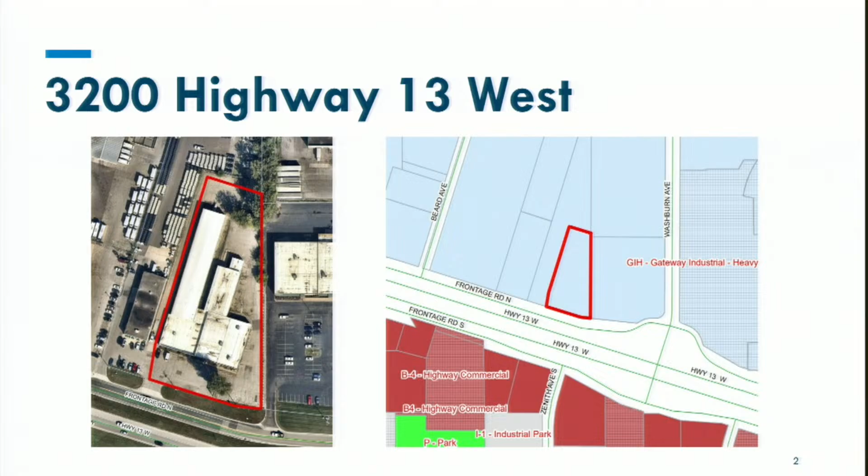Cannabis Connoisseur Company is seeking a conditional use permit approval to allow cannabis microbusiness at 3200 Highway 13 West. The property is currently zoned as GIH district, and within that district, cannabis microbusinesses are listed as a conditional use. Microbusinesses are defined as a person or entity licensed under Minnesota Statutes Chapter 342 to cultivate, manufacture, and sell cannabis products and related supplies, and to perform other activities authorized by the license. Cannabis Connoisseur Company is proposing only to do cannabis cultivation and manufacturing, with no retail components or features.

The purpose of the conditional use permit is to evaluate the use and the location, since it is heavily regulated by the state. They would occupy 9,800 square feet of space in the central portion of the building, directly west of Chillwater Cannabis Shop. Most improvements will be interior to the site, but there will be minor exterior improvements. These consist of a new rear employee entrance, infilling the east and west side doors, adding 3 to 4 parking stalls, and replacing the exterior doors with secure doors and locking mechanisms.

The Planning Commission previously approved Chillwater Cannabis Shop, I think it was two meetings ago, and at the time, Rootkind Holdings LLC had a purchase agreement in place to purchase the property. After further deliberation and consideration, Rootkind Holdings withdrew their purchase agreement, and the current property owner, Vern Equity LLC, will remain ownership of that property. The current property owner does not have plans to actively seek any other cannabis users. At this time, they only plan to allow these two cannabis tenants, the previous Chillwater Cannabis Shop and Cannabis Connoisseur Company.

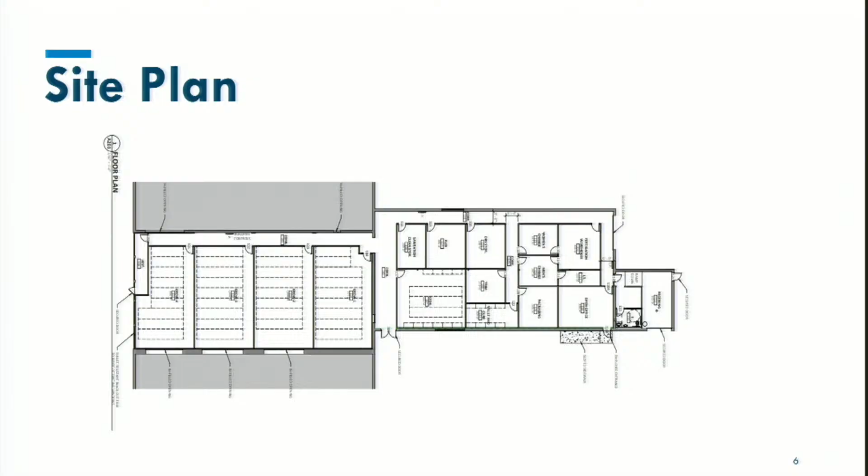City Code 10726 calculates the minimum number of parking stalls required for the site. This specific code section calculates parking stalls based on the use within the building, and staff calculated that the applicant requires a minimum of 13 parking stalls for the site.

Previously, Chillwater Cannabis Shop, staff calculated that they needed 18 stalls. That means together 31 stalls are required for this project.

Cannabis Connoisseur Company intends to add an additional 3 to 4 stalls to the north portion of their property near the new primary employee entrance. That will create a total of 42 to 43 parking stalls, exceeding the minimum parking requirements for this project.

The delivery vehicles will utilize the internal driveways to get to the property. They expect 5 to 7 deliveries per week, usually consisting of things such as soil, nutrients, pots, and processing materials, with common delivery vehicles being cars, pickups, and small box vans.

These deliveries will occur from 11 a.m. to 5 p.m., and unload time typically will take around 10 minutes.

Cannabis Connoisseur will not be transporting their own products because they are not a licensed cannabis transportation company. Instead, they will hire a licensed transportation company to deliver all their products to licensed retailers for resale or wholesalers.

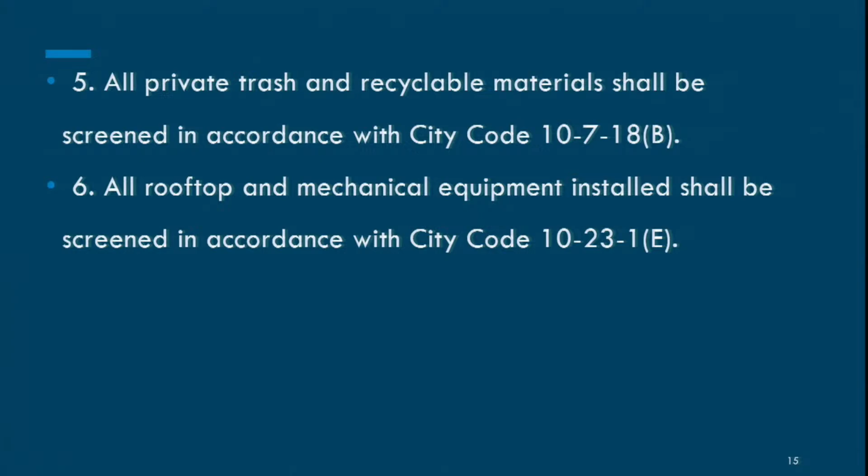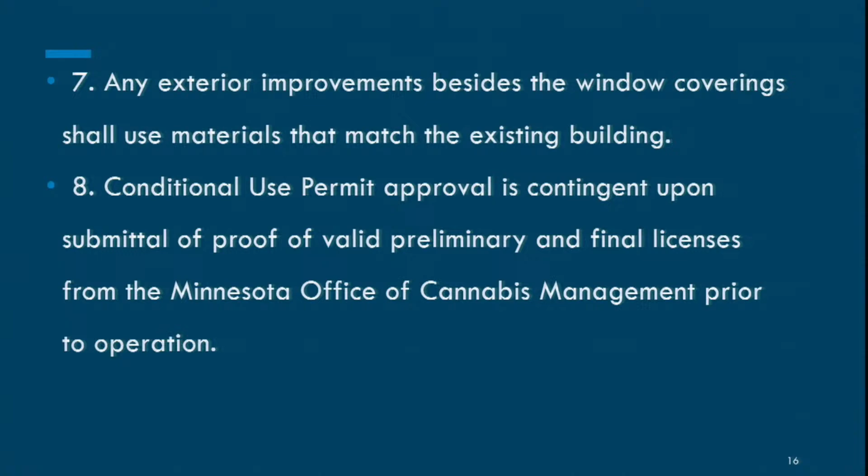All private trash and recyclable materials shall be screened in accordance with City Code 10718B. All rooftop and mechanical equipment installed shall be screened in accordance with City Code 10231E. Any exterior improvements besides the window covering shall use materials that match the existing building. Conditional use permit approval is contingent upon submittal of proof of valid preliminary and final licenses from the Minnesota Office of Cannabis Management prior to operation. The business shall maintain all required state licenses for the duration of the conditional use permit.

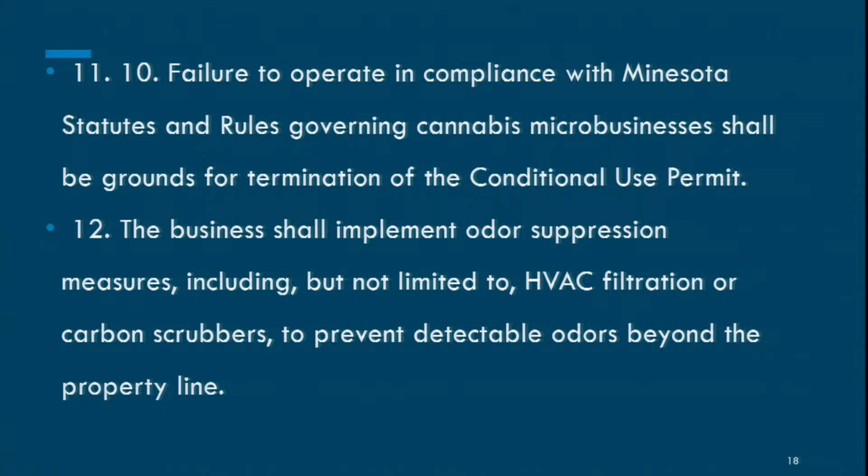All cannabis cultivation and manufacturing activities shall be fully contained within the principal structure. No outdoor activities or storage are permitted. Failure to operate in compliance with Minnesota statutes and rules governing cannabis microbusinesses shall be grounds for termination of the conditional use permit. The business shall implement odor suppression measures, including but not limited to HVAC filtration or carbon scrubbers, to prevent detectable odors beyond the property line. Security measures shall be installed and maintained consistent with the Office of Cannabis Management requirements and city code, including controlled access, exterior lighting, and surveillance cameras.

With that, I will stand for any questions that the Planning Commission may have for me.

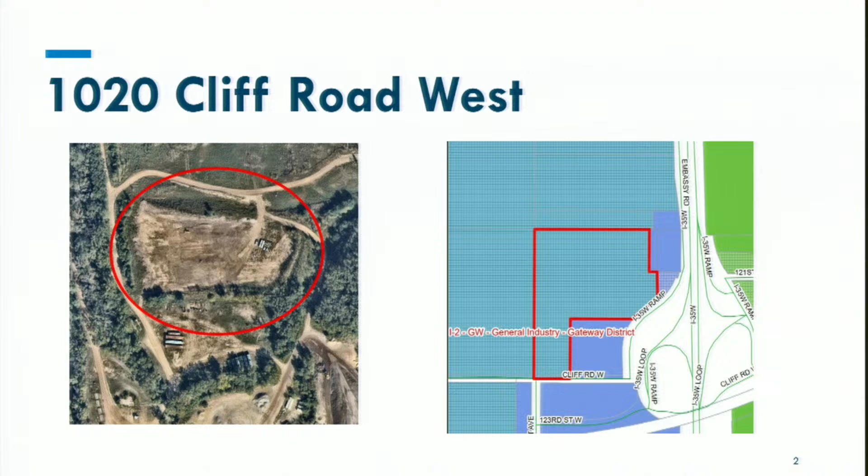Those specifically properties directly to the east and south in that other blue color indicate Ivy Brook Parking and also Commercial Asphalt Company. Directly east of the property is I-35W.

Carba is requesting 2 conditional use permit approvals: one to allow up to 5 kilns on the site, and the other to allow the storage of materials and equipment in the flood fringe. They currently have a year-to-year lease with Kraemer, located on the northeastern portion of their property. They intend to produce biochar by heating and drying wood chips, completely outdoors, and the current site is horizontally bisected by a flood fringe.

When they make their biochar, they intend to send their final product to Burnsville Sanitary Landfill to sequester carbon and to mitigate landfill odors.

Kraemer Mining and Materials owns the subject property and has received several approvals over the past several years. Most notably, approval from 2003 was a conditional use permit to grade and fill 40 acres of their flood fringe in the northeastern portion of their property, which is where Carba is currently located. The site at the time ranged in elevations of 700 to 720 foot elevation.

The flood fringe was about 717 feet, and the conditional use permit allowed Kraemer to increase their elevation between 717 and 721 feet above the flood elevation, therefore above the flood elevation itself.

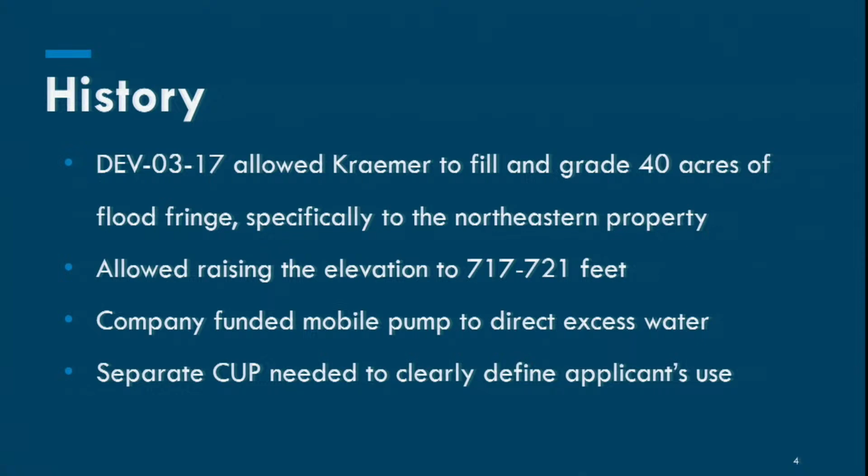Before 2003, the site was used as a holding site for rain events. As such, Kraemer paid the city to operate a mobile pump to force water from a nearby drainage ditch in high water conditions. This conditional use permit request is needed to separate the applicant's use from Kraemer and also to prevent liability for the property owner.

The first conditional use permit request is to allow kilns on the site, a maximum of 5 kilns on the property. The subject property is zoned I2 district, and kilns within that district are listed as conditional uses.

There will be a variety of equipment on the site, one of which will be a kiln. The other equipment includes things such as a storage trailer, rotary dryer, and stacking conveyor. All of this equipment will be stored on top of a concrete pad, and a vegetative management company will deliver wood chips daily to the site.

The wood chips will be stored in a trailer, conveyed to a rotary dryer, and then transferred to a rotary kiln to create the biochar. The operators will sample the biochar as it exits the rotary kiln for quality. It is then cooled, misted, and conveyed through a stacking conveyor. It's anticipated about 60 yards of biochar will be produced per day.

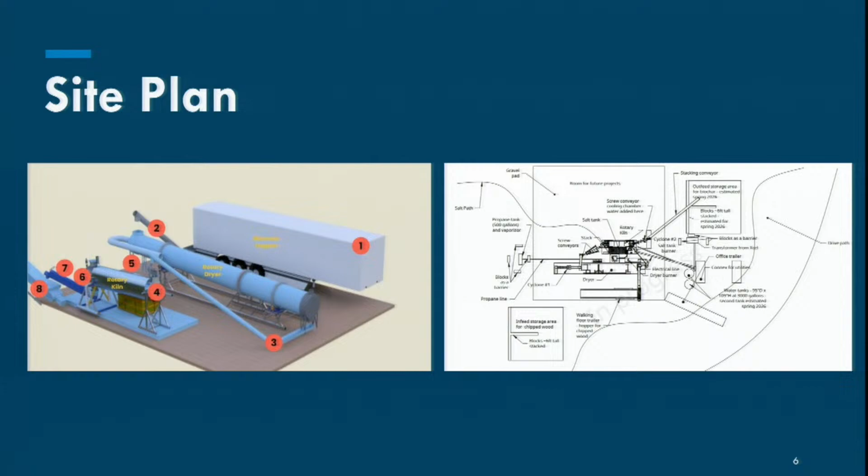Carba intends to start with one kiln for their project, and as they continue on, there's potential for increasing to an additional 4 kilns on site for a total of 5 kilns.

They don't anticipate any significant noise will be produced on site, considering that the rotary dryer and kiln have a 9-inch thick exterior. It will likely not be louder than any ambient industrial noise to the surrounding areas, and likely not louder than traffic along Interstate 35W.

There's potential for some odor to emit from the site, and this will likely be a woody or smoky scent, but this odor will not surpass the Minnesota Pollution Control Agency's, or MPCA's, odor emission thresholds or Burnsville's nuisance codes.

The applicant did speak with the MPCA, and the MPCA determined that Carba will operate below their thresholds. For their own due diligence, Carba reached out to them and requested what's called an applicability determination report, also known as an ADR, for their own records. That is basically a formal MPCA review to determine applicable state or federal air permitting requirements, and MPCA will complete this within the calendar year.

The second request for the conditional use permit is to allow the storage of materials within the flood fringe. Looking at FEMA's mapping website, the most current FEMA map is from 2011 of the subject site, and it shows that where Carba will be located is in a flood fringe.

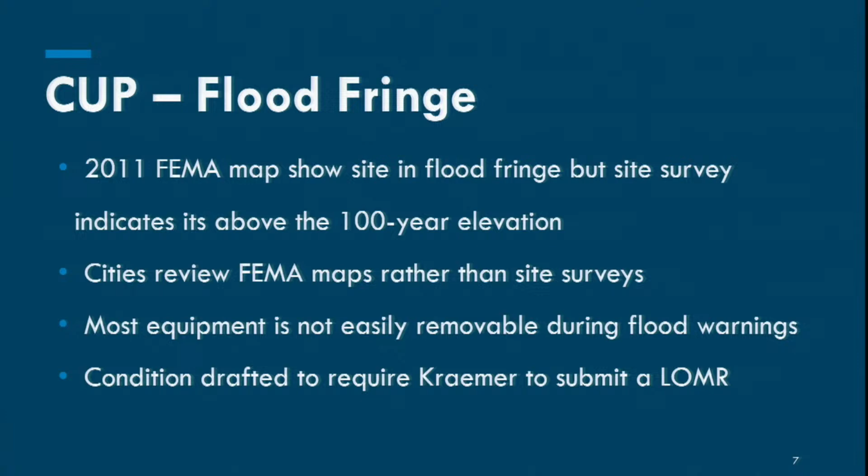Staff met with Kraemer to discuss this application and notify them that the FEMA maps are not up to date despite the 2003 approvals. Staff encouraged them, in their best interest for improving their flood insurance, and also if they intend to redevelop the northeastern portion of their site where Carba is located, that it's in their own best interest to complete a letter of map revision, also known as a LOMR. This is basically to update the flood hazard information and prevent discrepancies in the FEMA map. Staff added this as a condition to the report, and we asked Kraemer beforehand if this was an appropriate condition they were amenable to, and they agreed it would be. They had spoken with their legal team and agreed this was a good thing to do, and it sounds like they've just started some of the surveying work.

The site is located in the Drinking Water Protection Environmental Overlay Zone, and staff does not anticipate any impacts to the water resources. The kilns will be installed on a concrete pad, which will prevent soil infiltration, and Carba does not expect any leaks of the rotary kiln because introducing oxygen to the mechanism would substantially reduce the efficiency of the production of the biochar. Molten salt within the mechanism cools and solidifies at 446 Fahrenheit, and once solidified, it will not permeate into soils. If it did have a potential leak, the molten salt is non-toxic and not reactive to water. Carba also confirmed that the site has a secondary containment mechanism for potential spills.

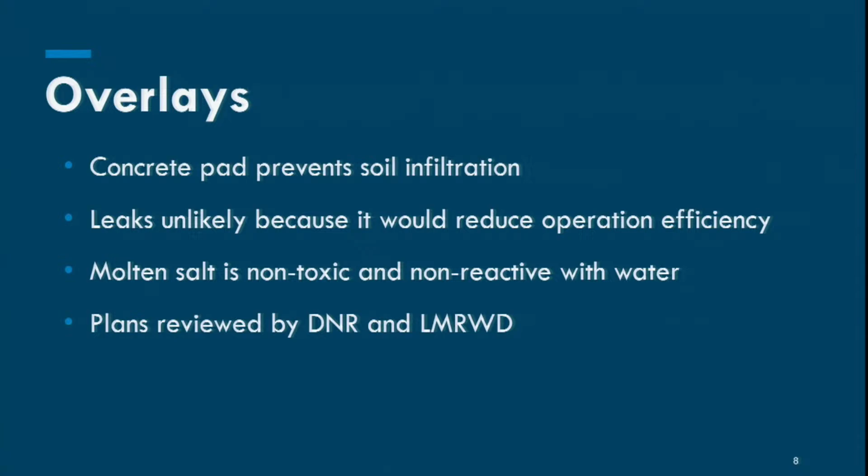We provided plans to the Minnesota Department of Natural Resources and also the Lower Minnesota River Watershed District, and they provided some comments about this, which can be seen in the report. To summarize, the DNR stated that the primary concern is ensuring that no materials are stored in the floodplain that are prohibited pollutants, and runoff shall go to a stormwater management system or be directed away from the floodplain. Staff required that berms be incorporated to prevent runoff and spills from reaching the surface water. After further analysis, staff also decided that it does not trigger additional stormwater management requirements. Staff then provided these plans to the Lower Minnesota River Watershed District, and they stated that a Rule C permit would be needed if land is filled or altered below the 100-year flood elevation. Lower Min recommended that Kraemer complete a letter of map revision with FEMA or the DNR for the area requiring updates.

There will be a gravel compacted area for employees to park on site. They anticipate having 2 to 3 vehicles parked at the site. These will be personal vehicles, and they will access the property either by Embassy Road or Cliff Road West using the site's internal gravel driveways.

The vegetative management company will provide 100 yards of wood chips per day. Carba will transport the biochar to Burnsville Sanitary Landfill every 2 weeks with a company trailer, and on the day they do that, it would be about 4 to 6 trips that day using the private roadways.

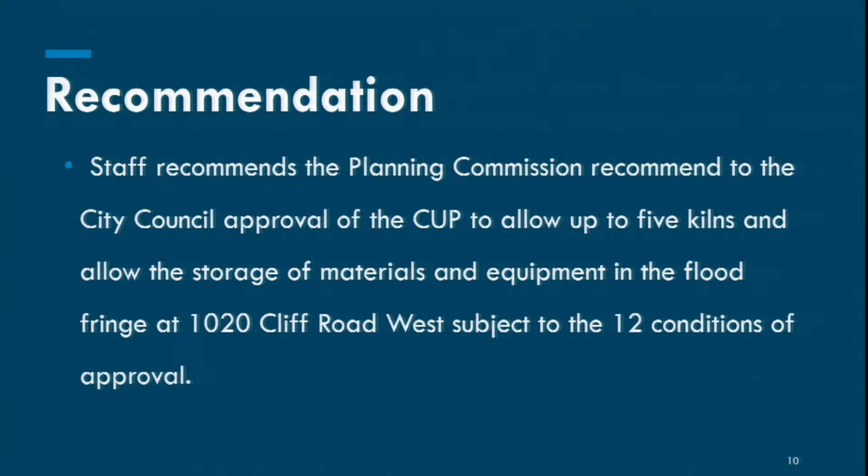Staff recommends that the Planning Commission recommend to the City Council approval of the conditional use permit to allow up to 5 kilns and allow the storage of materials and equipment in the flood fringe at 1020 Cliff Road West, subject to the 12 conditions of approval. The project shall be completed in accordance with the plans submitted as amended by the conditions of approval. Any significant changes to the plans as determined by planning staff shall require review and approval by the Planning Commission and City Council. The project shall comply with all applicable local, state, and federal regulations, including but not limited to MPCA's regulations and building and fire codes.

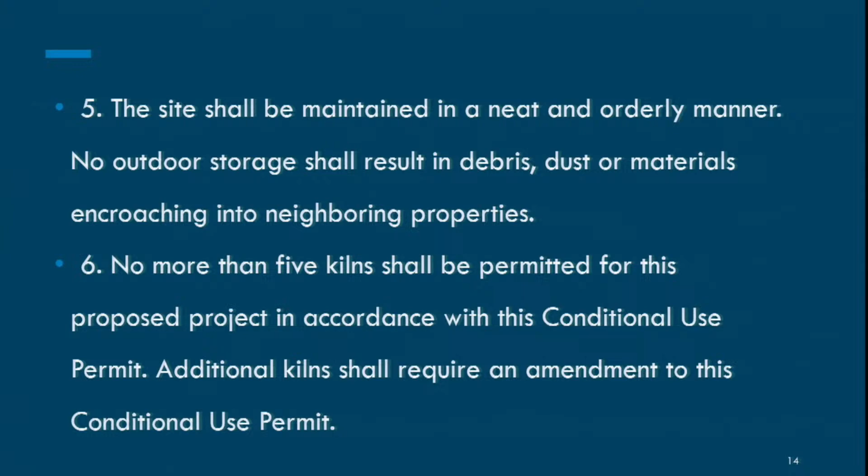Kraemer Mining and Materials shall submit a letter of map revision to FEMA within the calendar year of the City Council date. Conditional use permit approval shall expire 1 year from the date of City Council approval unless a building permit has been requested or a time extension has been granted by the City Council. The City Council may extend the expiration date of such approval upon written application by the person to whom the approval was granted. The site shall be maintained in a neat and orderly manner. No outdoor storage shall result in debris, dust, or materials encroaching into neighboring properties. No more than 5 kilns shall be permitted for this proposed project in accordance with the conditional use permit. Additional kilns shall require an amendment to this conditional use permit.

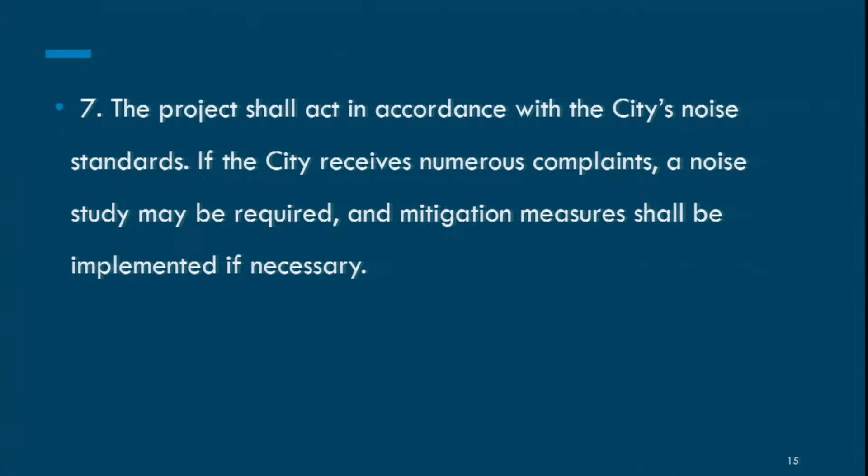The project shall act in accordance with the city's noise standards. If the city receives numerous complaints, a noise study may be required, and mitigation measures shall be implemented if necessary. The project shall comply with MPCA's odor regulations and the city's nuisance codes. If the city receives several complaints, the applicant shall take corrective measures to resolve the issue in a timely manner.

Any new exterior lighting shall be downward directed and meet City Code 10736. The project shall not have hazardous or environmentally detrimental materials or pollutants on site. This approval shall run with the land, but applies specifically to the biochar production facility.

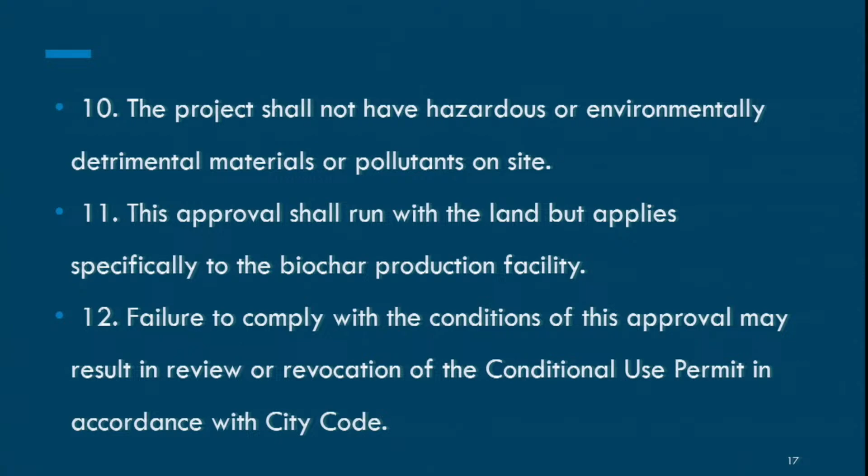Failure to comply with the conditions of this approval may result in review or revocation of the conditional use permit in accordance with the city code. With that, I will turn it over to the planning commission for any questions that you may have.

Thank you very much for a very detailed presentation. All right, commissioners, go ahead. Holly.

Excellent presentation, thank you. This is kind of a weird question, but condition number 3 is that Kraemer Mining and Materials shall submit a letter of map revision, but they're not the applicant. Is it because they're essentially the landlord in this process? How do we enforce that, since Kraemer Mining is not at the table here, they're not the applicant?

Right, yeah, that's a good question. We provided this condition because this was something that the Lower Minnesota River Watershed District highly encouraged that we pursue. We did have conversations with Kraemer to ask them if this was an appropriate condition to add, and they did agree to that. I understand it is confusing to have that as a condition, but after speaking with staff, it was my understanding that this is not something that CARBA would be responsible for completing. This is something that the property owner would be responsible for satisfying.

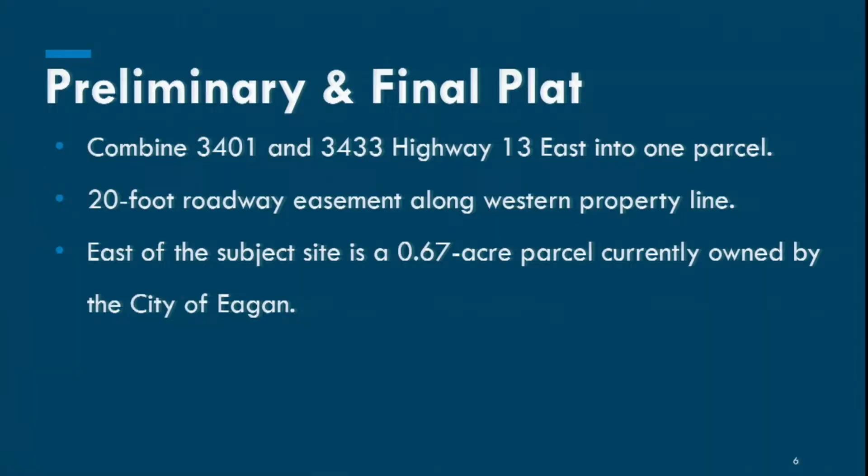The first application before the commission is a preliminary and final plat, again to combine the 2 subject sites into 1 parcel. I'll highlight 2 items before the commission that are unique to this application. The first is a 20-foot roadway easement that exists along the western property line, and the second is that 0.67 acre parcel currently owned by the City of Eagan.

The 20-foot roadway easement is highlighted in gray on screen. It runs the entire length of the western property line and actually continues through the property to the south, the Rivers Retirement Community, and is the access off of Highway 13 to the subject site. The easement was originally created in 1950 and was platted in 1964 as part of the River Hill 7th Addition plat. Details of the easement, including any maintenance terms, are unknown, as staff, the attorney, and the applicant have researched this in depth but haven't been able to locate any specific details, really due to the age of the document dating back to the 1950s.

Kwik Trip is proposing access within this roadway easement area. However, the access proposed is 24 feet in width, so wider than the 20-foot easement. As a result, there is a condition of approval that requires Kwik Trip to either record a new easement that allows for the width, or narrow the access width to 20 feet to stay within that easement area.

In addition, within the conditions of approval in your packets, it includes maintenance agreement requirements with the property owner to the south, as the access would cross property lines.

The second item is the parcel within the 0.67 acre parcel highlighted in yellow or orange on screen. That parcel was originally created related to MnDOT intersection improvements at Highway 13 and Diffley Road. The legal documents for that parcel state it's to be used for roadway purposes only. As a result, the 0.67 acre parcel is working with the state to remove that language, which would allow Kwik Trip to purchase the parcel and utilize it as a site access to the subject site, with access off of Diffley Road. There's a condition of approval requiring Kwik Trip to show full ownership prior to recording of the final plat for that parcel.

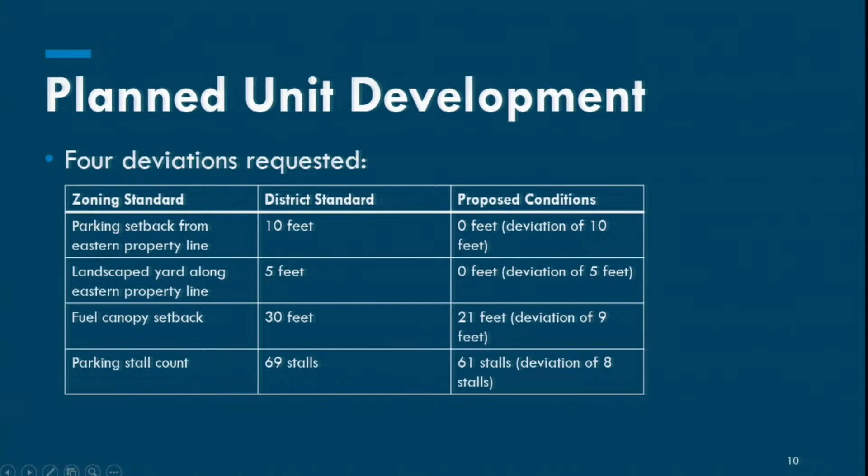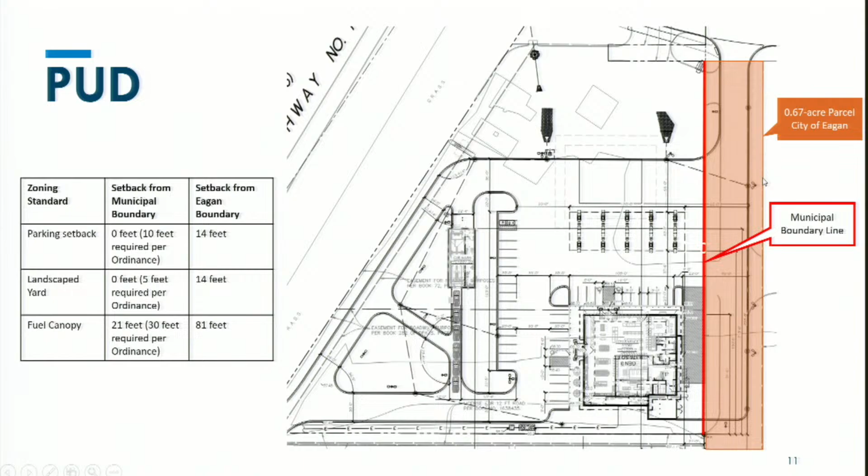The 4th and final deviation requested is for parking stalls. The applicant is requesting a deviation of 8 stalls, which is based on vehicle turnover, which does occur at a high rate within fuel stations, and the floor area calculation utilized by the applicant versus the city.

The applicant utilizes a parking ratio based on actual retail area of the building, while city code bases it off of the entire square footage of the building minus 25%, which is intended to account for bathrooms, utility rooms, mechanical rooms, and the like. In this case, the calculations differed by 8 stalls.

However, the applicant is intending to meet the ordinance requirements, but is proposing to utilize their calculation, which is based off strictly the retail area where customers are actually functioning, or mostly visiting, within the store.

The Development Review Committee of the city did review this and had no concerns, as the parking does align with other motor fuel station sites that have been developed throughout the city.

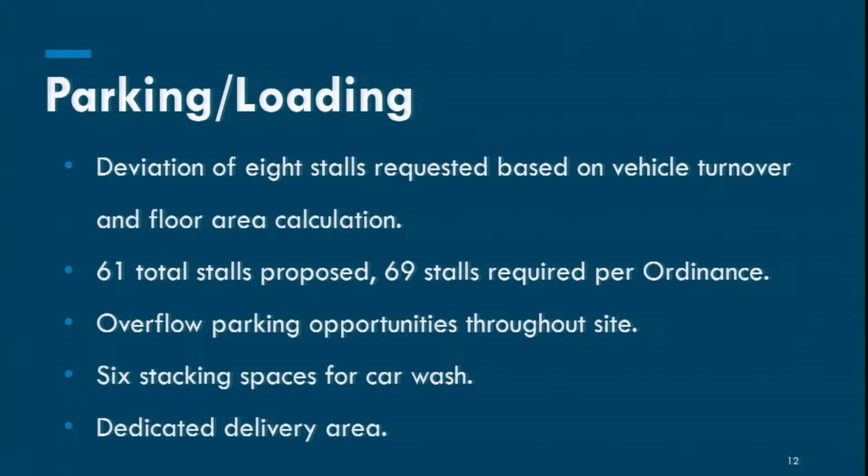As mentioned, the applicant is proposing a total of 61 stalls, and I'll also note that overflow parking opportunities are temporarily provided along the eastern side of the building. If there's a peak time with a ton of vehicles for a major event or something, they could temporarily park here while they visit the store, something of the like.

The applicant is proposing a total of 6 stacking spaces for the car wash. Code requires a minimum of 4, so the applicant is exceeding that. And they are proposing a bypass lane here in case vehicles do want to bail out.

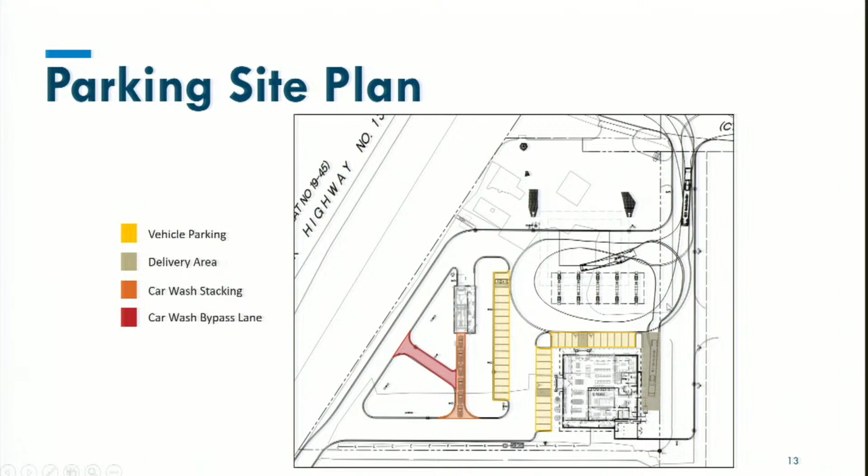A dedicated delivery area is proposed along the eastern wall of the building, which would be painted and striped accordingly. You can see the circulation movements for larger vehicles—it's a very easy maneuver for them to make.

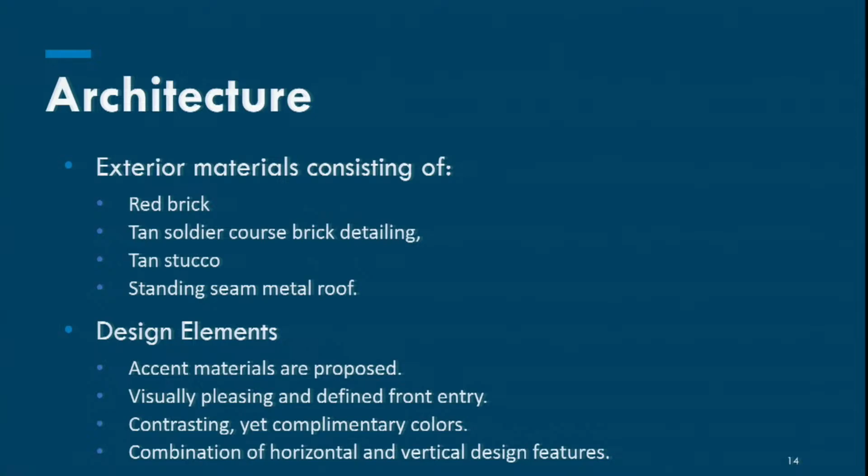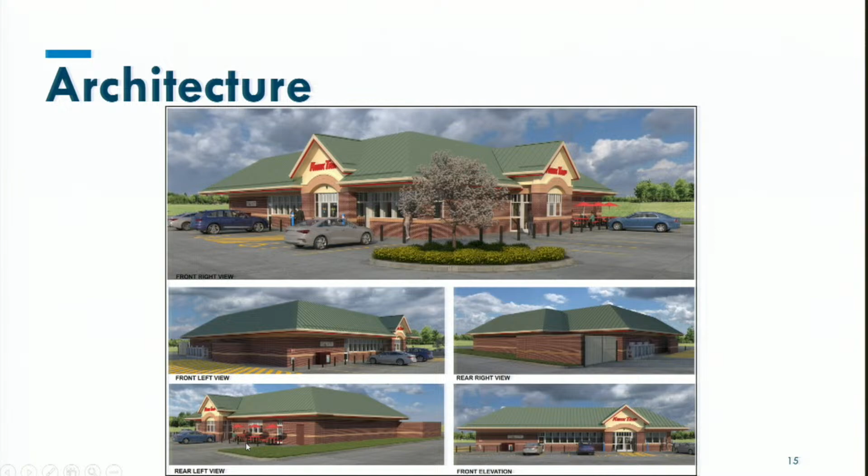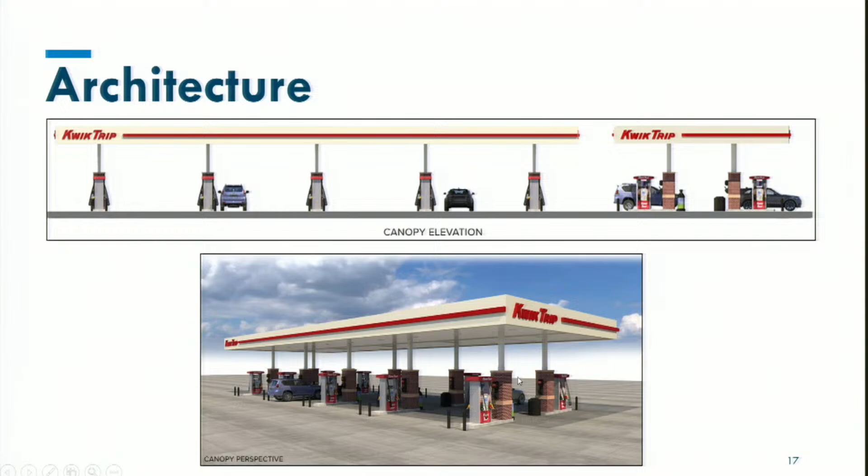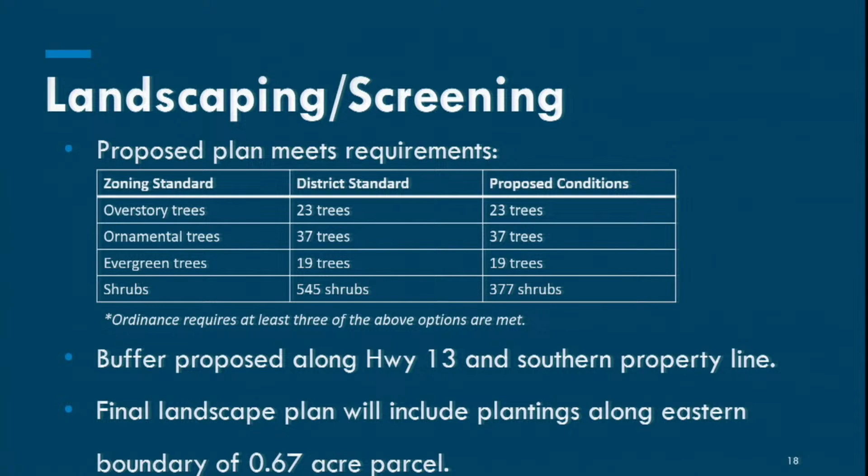There is a condition requiring a final landscape plan to be approved by planning staff, which includes plantings along the eastern boundary of the 0.67 acre parcel. Per Eagan's request, plantings were requested to screen headlights from the residential development to the east.

The landscaping plan is shown on screen. The western image shows the overall site, and the eastern image zooms into the main portion of the site. Again, the buffers are along Highway 13 as well as that southern property line.

I'll note that the applicant put a lot of effort into ensuring the proposed plantings would screen headlights year-round, recognizing the community to the south as well as the delivery area where trucks would likely have their headlights pointing. The plants would be at a height that sufficiently screens the taller vehicles year-round.

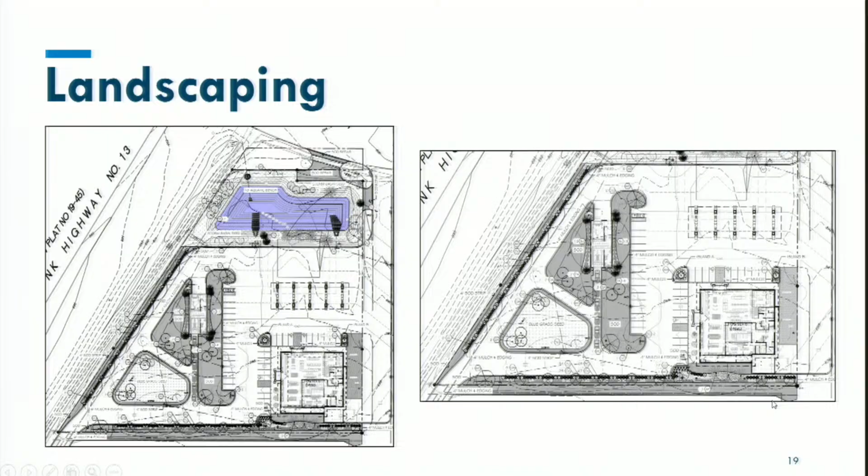In terms of planning considerations, the application does meet the requirements of the city code. Motor fuel stations and accessory car washes are allowed with a conditional use permit. The applicant has made efforts to minimize adverse impacts to surrounding properties. The proposal does align with the 2040 comprehensive plan and meets the intent of the zoning ordinance as well.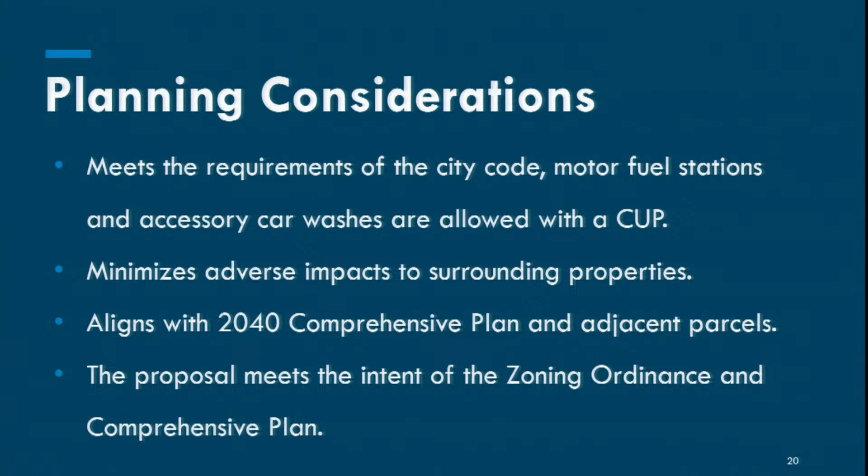The recommendation is on screen before you. I will also note one of the recommendations, number 4, is to terminate existing conditional use permits and variances. That is just to clean up the subject site. There's a lot of old approvals sitting out there dating back to the 60s, so it just starts with a clean slate and resets things moving forward with the redevelopment project.

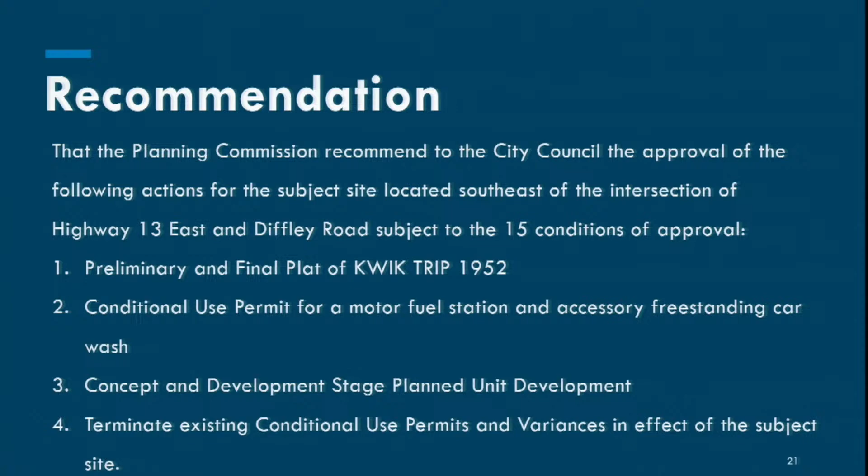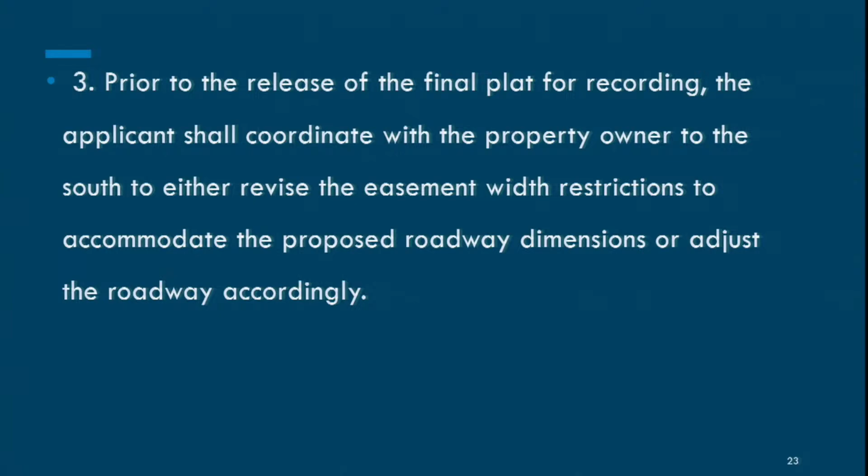For conditions of approval: the site shall be platted with the Dakota County Recorder's Office prior to the issuance of any building permits. Prior to the issuance of the final plat for recording, the applicant shall pay applicable development fees. Prior to the release of the final plat for recording, the applicant shall coordinate with the property owner to the south to either revise the easement width restrictions to accommodate the proposed roadway dimensions or adjust the roadway accordingly. Prior to the release of the final plat for recording, the applicant shall demonstrate full ownership of the .67 acre parcel located immediately east of the subject site within the city of Eagan.

Prior to the issuance of a building permit, all outstanding items from the February 27th, 2026 City Engineer Review Memo shall be addressed to the satisfaction of the City Engineer. Prior to the issuance of a building permit, the applicant shall address and incorporate all applicable comments from third-party agencies. Prior to the issuance of a building permit, the applicant shall provide required securities for landscaping, bituminous paving, and concrete curb and gutter. Prior to the issuance of a building permit, the applicant shall revise the landscape plan to provide screening on the .67 acre parcel located within the city of Eagan. Prior to the issuance of a building permit, a final landscape plan shall be approved by planning staff in writing.

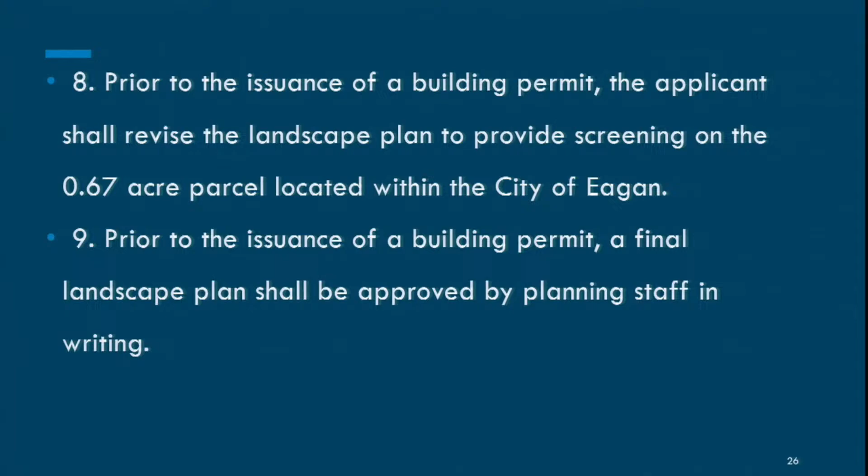Prior to the issuance of a certificate of occupancy, a maintenance agreement or similar agreement between the applicant and the property owner to the south for the shared access road from Highway 13 shall be fully executed and recorded with the Dakota County Recorder's Office. A copy of that agreement shall be submitted to the city. If repeat nuisance complaints are received regarding site operations, such as deliveries, noise, car wash hours of operation, and the like, the applicant shall work with city staff to resolve the complaints to the satisfaction of the city.

The car wash bay doors shall remain closed at all times, except when a vehicle is actively entering or exiting the bay, or when the bay doors are open for active maintenance. The applicant shall maintain landscaping to the edge of the curb on adjacent roadways. In the event the property owner to the south seeks a trail connection to the subject site, the applicant shall provide a reasonable location and opportunity for such a connection, subject to review and approval by city staff. And prior to the installation of any on-site signage, a sign permit shall be obtained by the applicant.

With that, I'll leave the recommendation on screen, available for questions, and the applicant is in attendance as well. All right, great presentation, thank you. Any questions from commissioners? Commissioner Howard.

Thank you, I do have a question. Condition number 4: prior to the release of the final plat for recording, the applicant shall demonstrate full ownership of the parcel that's now part of Eagan. Any idea on what the timing for that is? Because just in terms of process, you can't get a building permit until the plat has been recorded, right?

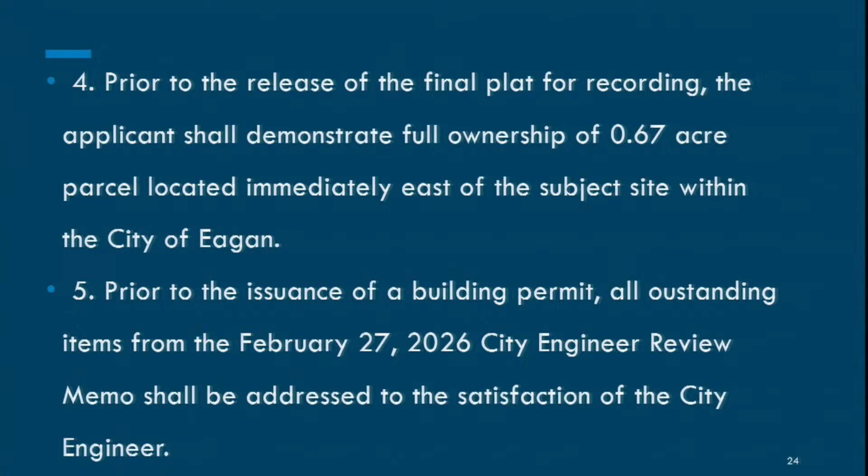So, timing? Yeah, that's correct, Commissioner Howard, that's correct. The intent of this is just to ensure before the final plat goes for recording and anything is official, because that outlot is included within the platted area, we want to ensure that the applicant owns that area as well. Yeah, I totally get it.

I'm just wondering, do you have a sense for what the timing of that process is? Because the state has to let the road go, and then Eagan has to let it go, and there's a lot of hoops to jump through there. That's correct, it's a detailed process. Eagan actually had to sue the state to get the language removed and is working through that process. But that's expected to be completed within the next 50 days.

Oh, okay. And then after that, they'd be able to move forward with purchasing that parcel. And I believe the city of Eagan might require platting of that within their city, but the applicant would proceed with Eagan on those items. Okay, thank you. Questions?

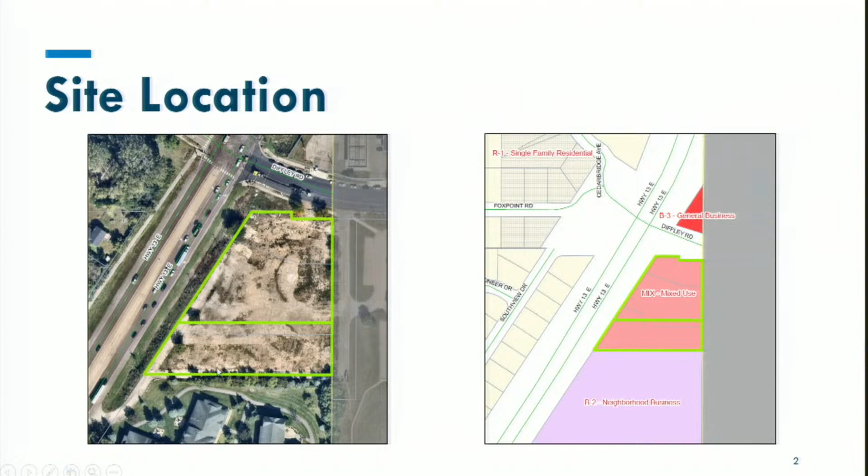Kind of a traffic flow question. The mall that was there previously, did they have a right turn out of that mall? Or how did they get out? The reason I'm asking—well, it looks like you're going to pull up the map probably. So I have two concerns. Are we adding a new right turn onto 13 that wasn't previously there?

I'd be curious what the traffic engineer has looked at, because at Nicollet we've had problems, and now we're adding a new one. So that's one question, whether it was there before or not. Second question: when cars come in, it almost looks like, for instance today I was at the Kwik Trip at 5 and 136th, and the stack for the car wash was probably 10 to 12 cars deep. Is that going to interfere with the right turn in? It looks like the cars are going to be stacking, and if they overflow out of that lane, they're going to be in the entrance lane. I'm wondering if that's been addressed.

Commissioner Long, first related to Highway 13, I don't believe there's a right out currently. There was a right in, as that access is currently there. So the new portion on Highway 13 would be a right out, which is being required by MnDOT as part of their review. In terms of traffic review, the city engineer didn't have concerns, believing that access will provide sufficient traffic levels, and MnDOT also reviewed for State Highway 13 and doesn't find concerns with the traffic volume or location access with the right out as they're requiring it.

Related to internal site circulation, staff has had a lot of conversations with Kwik Trip internally on how the site flows overall. With the car wash, because this is a tunnel car wash system, cars are constantly flowing through, so a huge stacking issue isn't necessarily anticipated because of that style. Also, this roadway or access width is 30 feet, whereas a standard one is about 24 feet. So the applicant has taken into account that on a peak event, like after a snowstorm, vehicles could wrap around here, and there'd be enough width to support a couple extra vehicles.

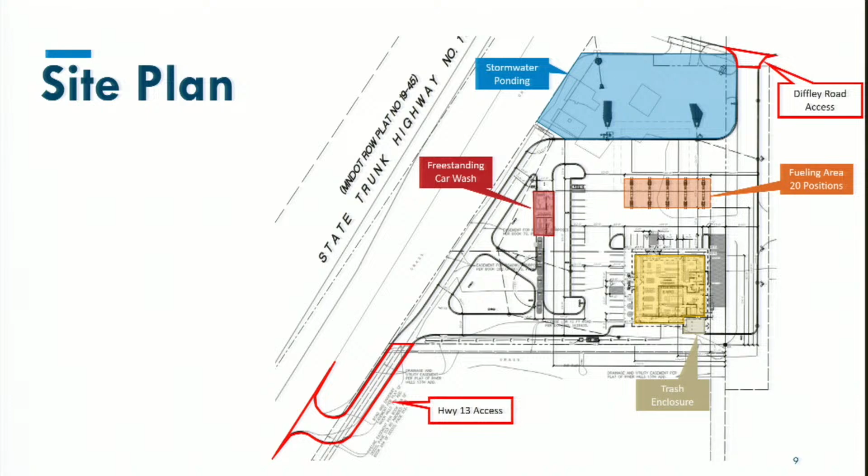Commissioner Anderson: going to that, I've used that access both in and out, and people could go out today even if it's not set up for that. Don't they have to put a lane in someplace for people turning out, so there's some buffer? I believe that's correct. Currently, the access width right now would be the same as Kwik Trip's proposing, so wider than that easement, supporting two-way traffic even though that's not necessarily the intent. Kwik Trip would be required to put that right turn out.

Has Eagan provided their input on this total project? Commissioner Hamilton, we've been working closely with the City of Eagan. We sent the entire submittal to them when we received it. The only comment we received was related to ensuring screening along that eastern property boundary for headlights. Otherwise, they didn't have any concerns at this point.

Another question: is it allowed, or is there space for semi-parking, perhaps just for overnight? No, Commissioner Hamilton, that's not the intent of the site. It would only be for fuel deliveries for the fuel pumps, but there wouldn't be room, or it wouldn't be permitted on site.